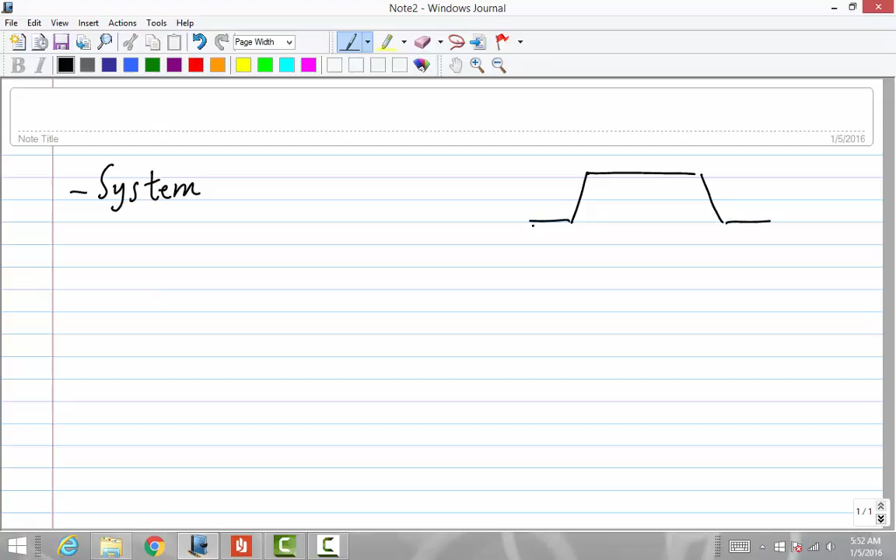Okay, so now let's talk about a system. Here I'm going to talk about how do we define a system. As an example, let's say you're in a gas station and you're taking gas. So here's your car, an old one with the wheels and stuff, and you're taking gas. Let's say here's your tank, the gas tank. And here's the nozzle, so there's a gas flow.

And simple, right? Let's say the question is about the gas. It might be about the flow rate, temperature, volume, all these properties we've faced so far. But let's imagine it is particularly about the gas.

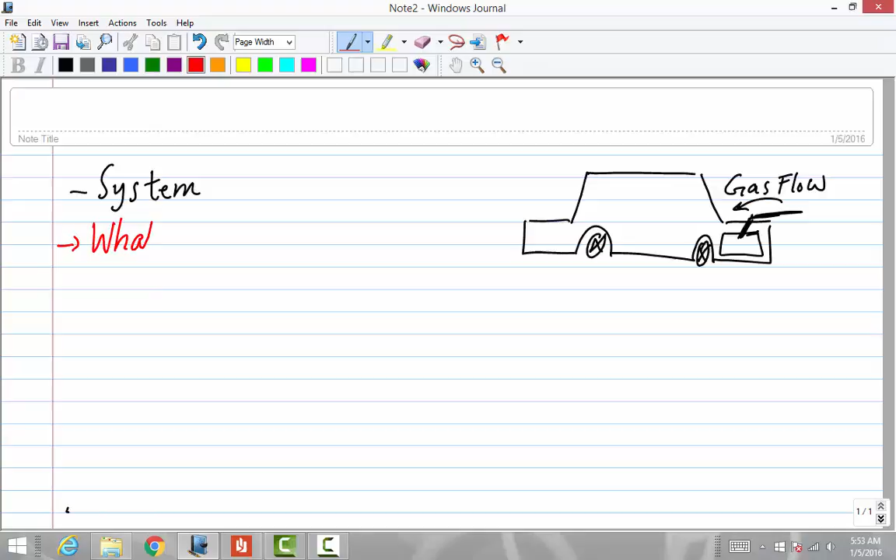So in this case, the first step we need to take is to define our system. But before defining the system and going over the solution and equations, we need to ask ourselves a critical question: what are we interested in? And also, our point of view. What do I mean by that?

In this case, we have two options. We can pick just the tank, the body, and define an inlet, which is the nozzle, or an outlet if there's any leaking, and continue solving the question. In the other case, we can just zoom in and concentrate on the gas, and as we're taking the gas, the system, which is just the gas, is going to expand, because there's going to be more gas in the tank. So it depends on your point of view.

You're just going to pick the tank as a fixed volume and imagine there's a little opening that the gas is coming in, or you just want to zoom in and concentrate on the gas and imagine it's expanding. So think about it a little bit more and imagine which of these two points of view you want to take.

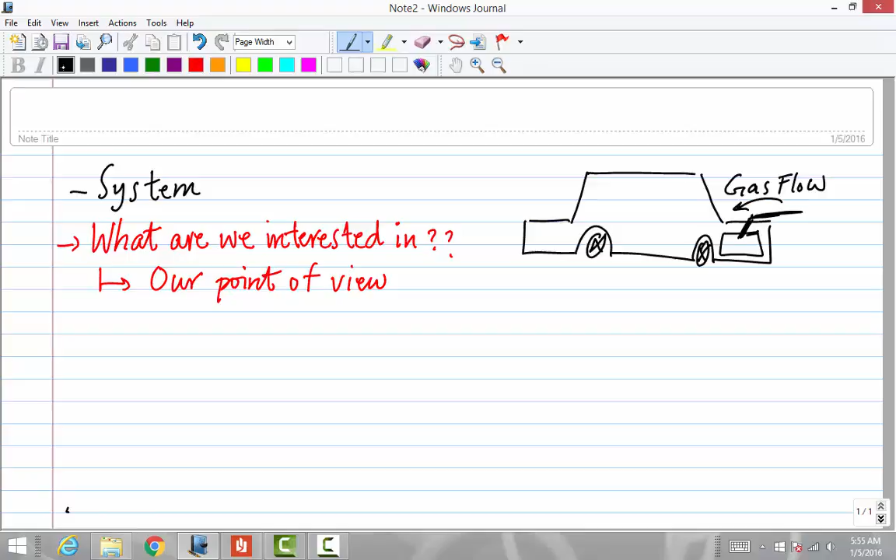So let me go into detail about this. We have two options: one option is an open system. What do I mean by open? It's about mass. When I say open, I am talking about mass, which means mass is allowed to be transferred. Or a closed system — again, closed, I mean mass.

So let me tell you again: do we only focus on the gas as it is expanding, or concentrate on the tank body? Which one is open? The tank. Because I mentioned we should imagine a little opening for the tank, that the nozzle goes in and infuses the fuel inside our system. So when you pick an open system, it means you are interested in a fixed volume, which is the tank body.

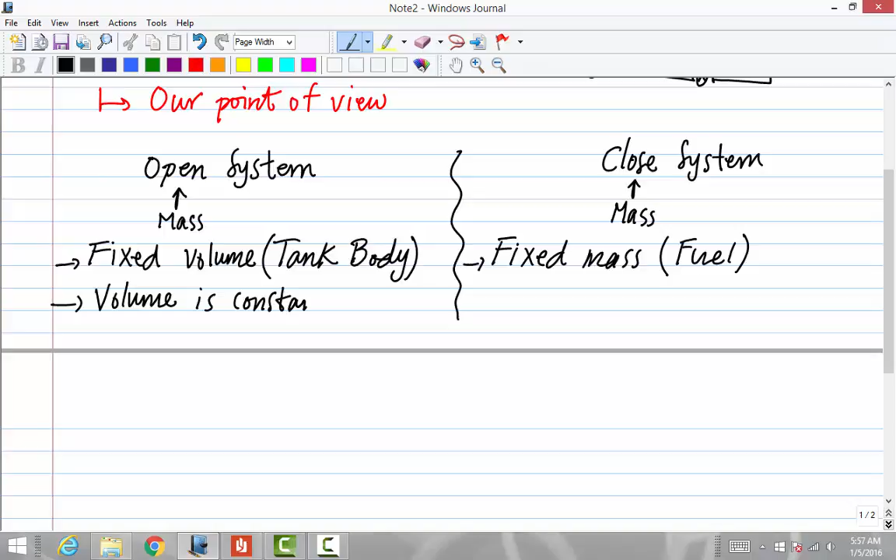But when you talk about a closed system, you are only interested in a fixed mass, which is the fuel, the gas. In this case, volume is constant. Here, in the closed system, volume changes.

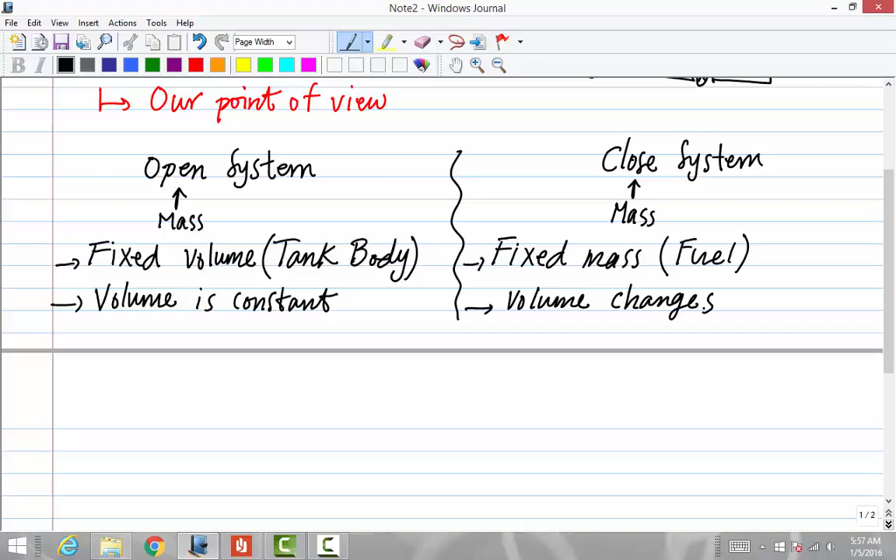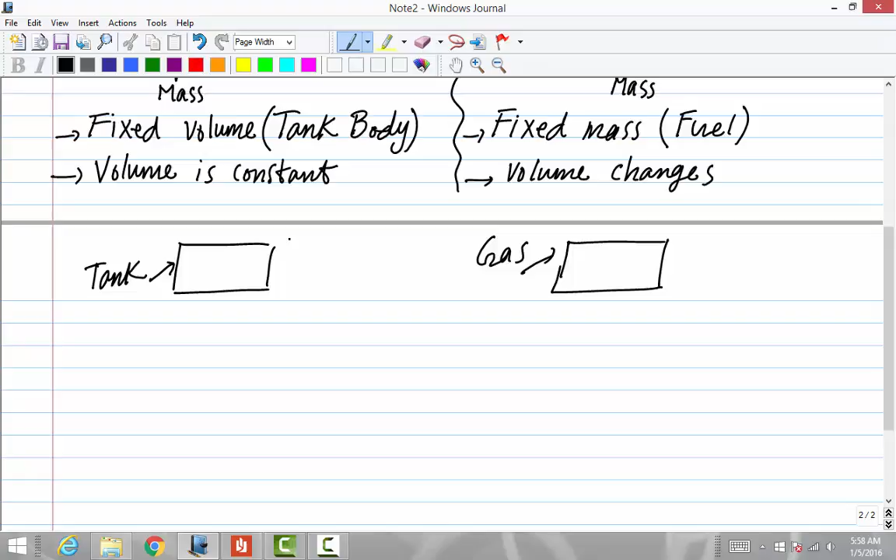The system here is the tank. Here is the tank. Here the system is the gas. It's a little bit tricky because here in the tank, in the left system, the tank includes the gas, right? But I'm repeating this again. It's just a point of view - how do we look at the system? Let me give you another example.

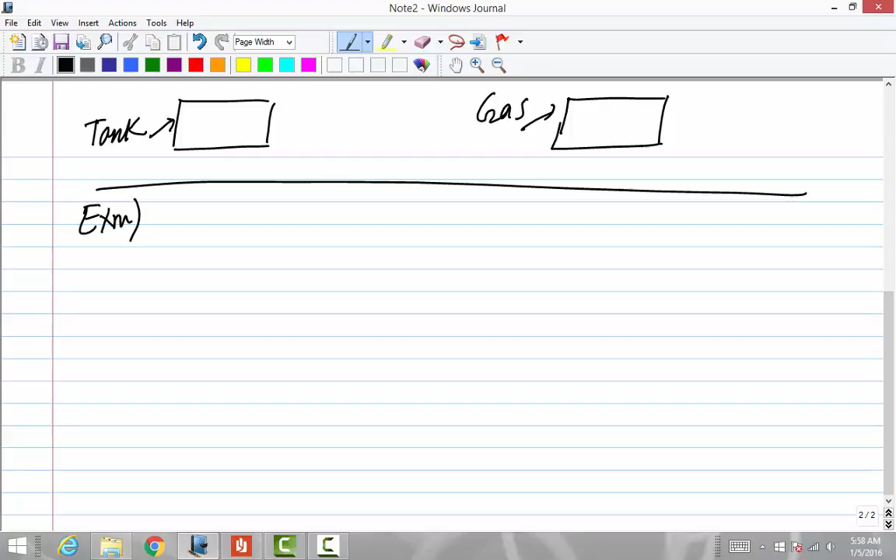Again, open system and a closed system.

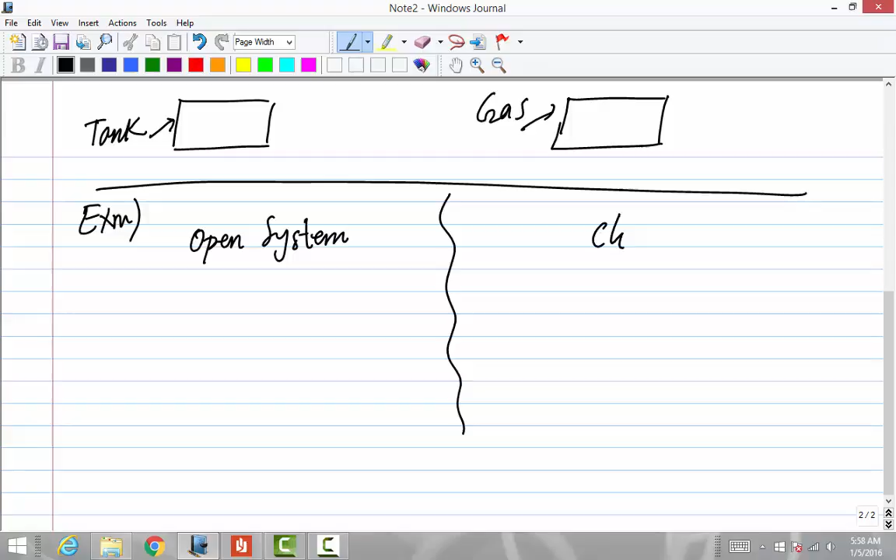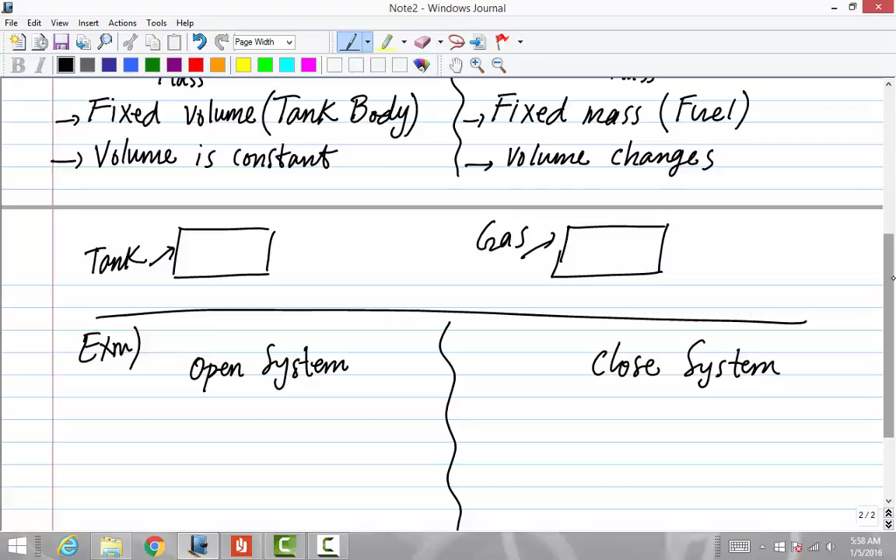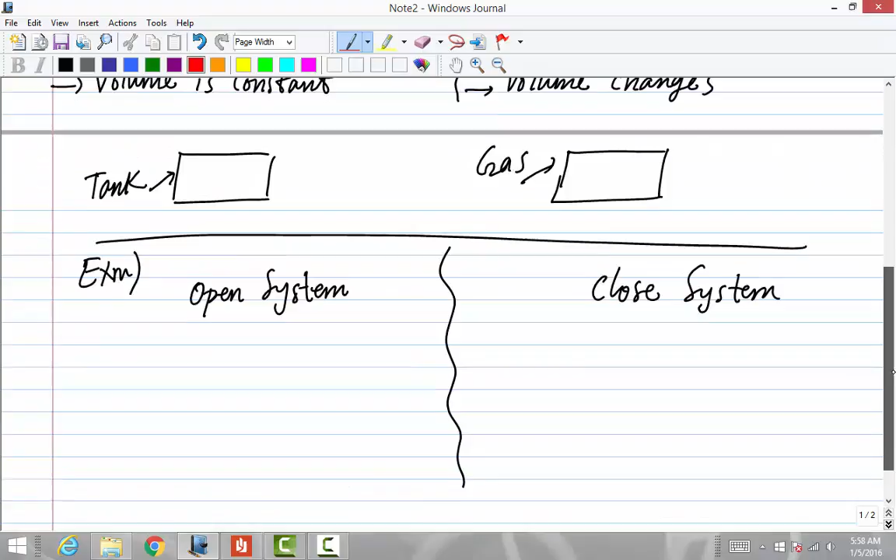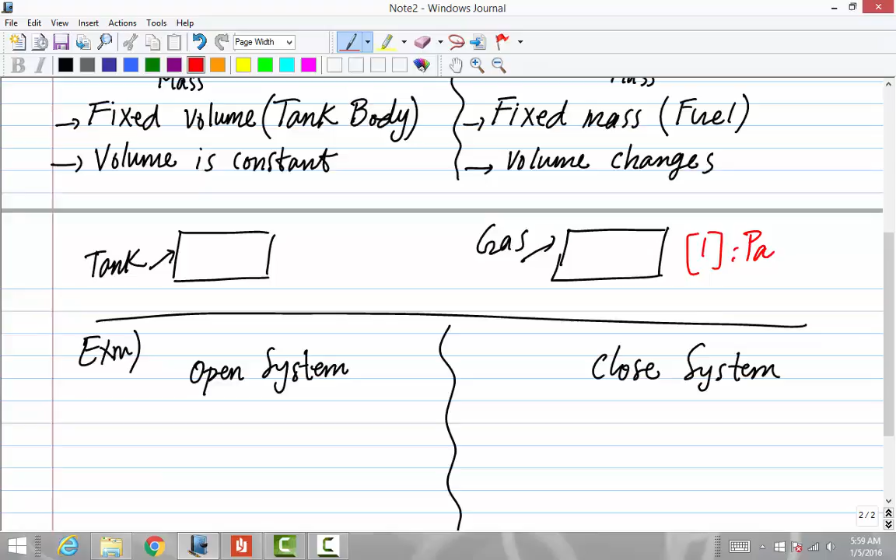Before I switch to the other topic, let me address here that you might want to take a look at lecture number 1, pages 1, 2, 3. Here for the open system, check lecture number 1, page 5. And for a closed system, again, number 1, page 4.

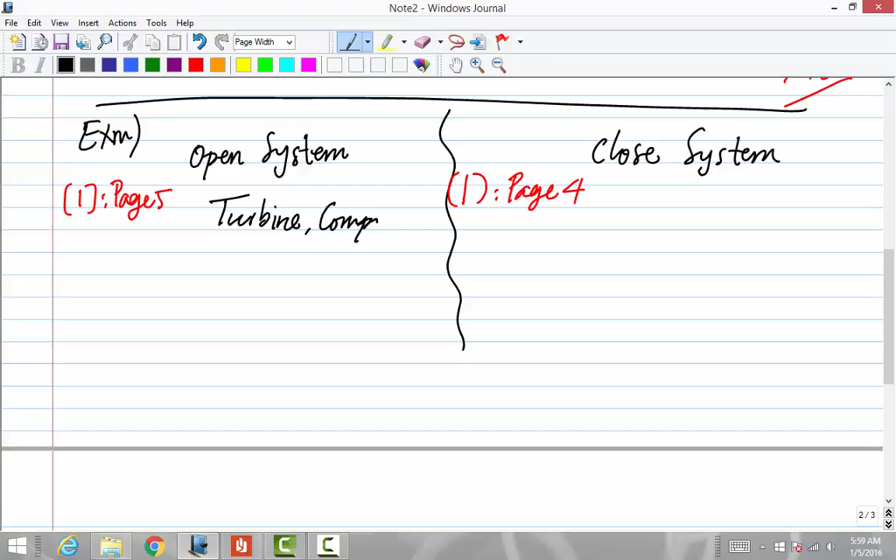A typical example for an open system can be a turbine or a compressor. These are two common examples. And here, piston cylinder. Okay?

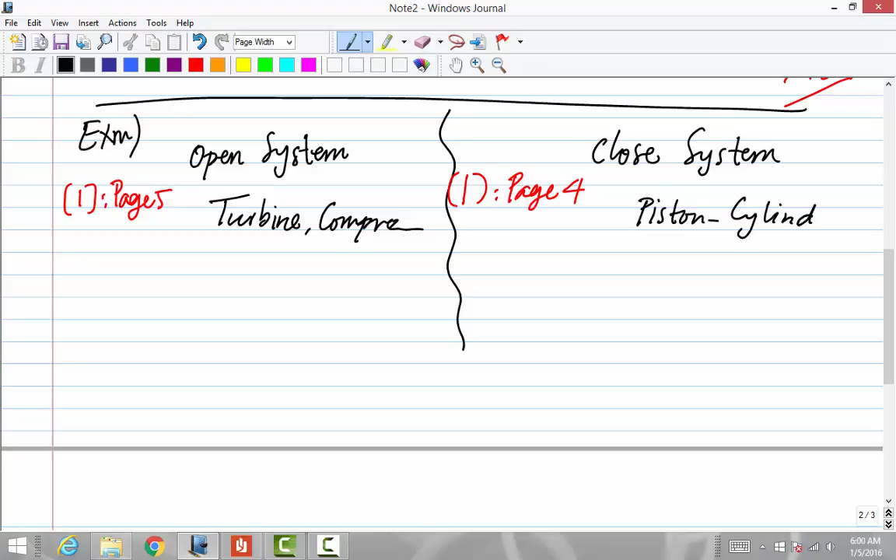So, in an open system, we're going to talk about a fixed volume. So we just concentrate, we focus on a fixed volume. And mass can come in and go out. Energy can come in and go out.

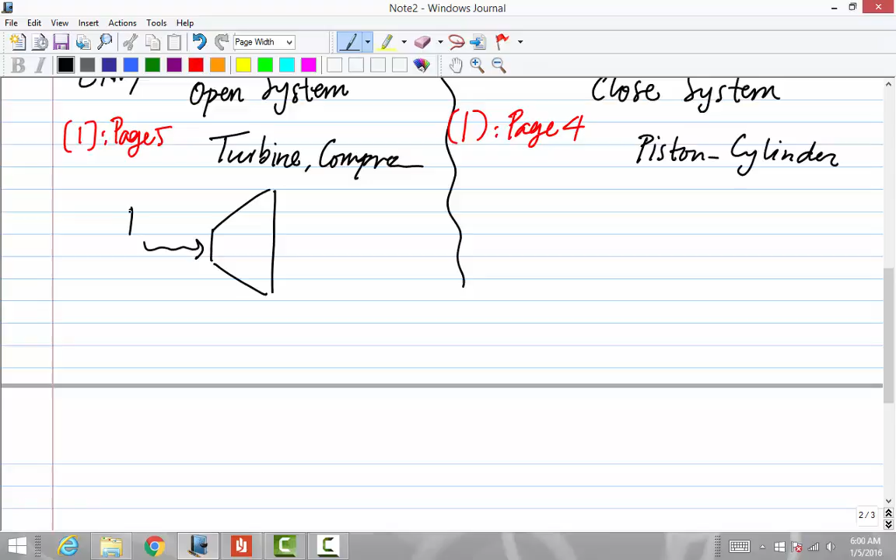So if I pick a turbine, mass and energy are coming in and leaving the system, right? And also only energy is allowed to leave the system through the boundaries of the body of this turbine. Only energy, because let's say it's perfectly sealed.

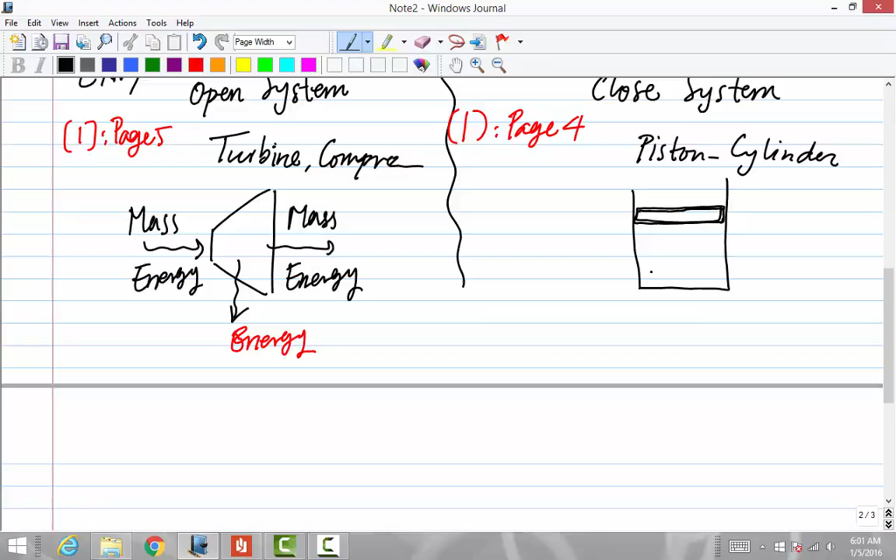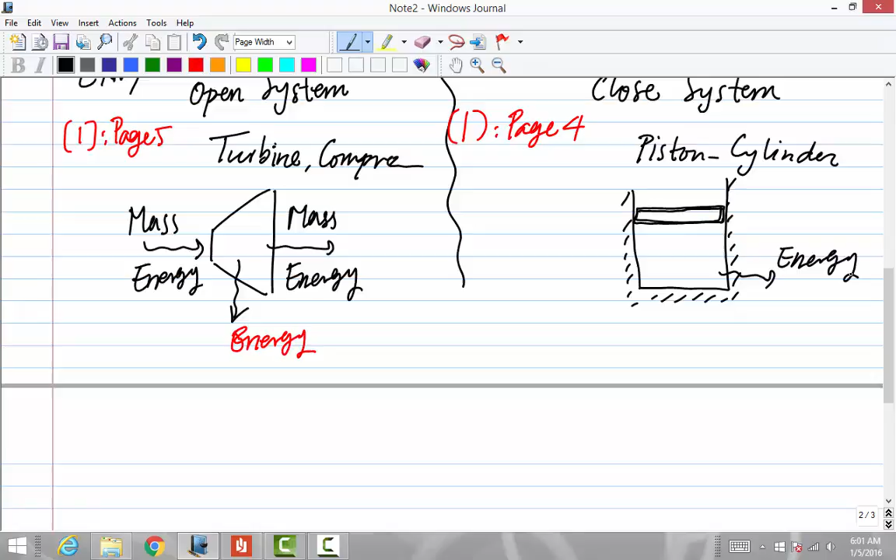On the other side, I have a piston cylinder device, right? The piston is relaxed on this gas underneath, and it can freely move, and the body and the walls are perfectly sealed, so only energy can leave the system, not the mass. Again, this is a closed system, no mass - unless there's an opening there somewhere, an exit or inlet or leaking or something.

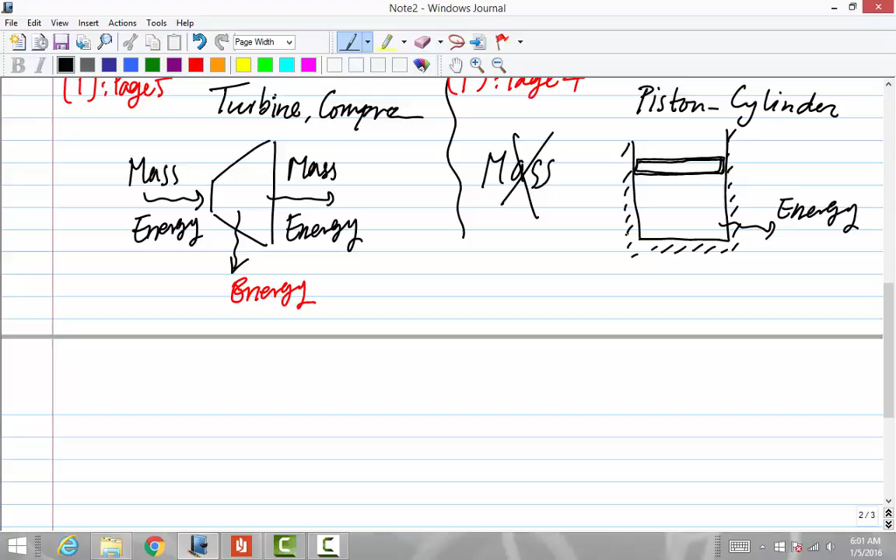So in this case, in an open system, we are working with an imaginary boundary.

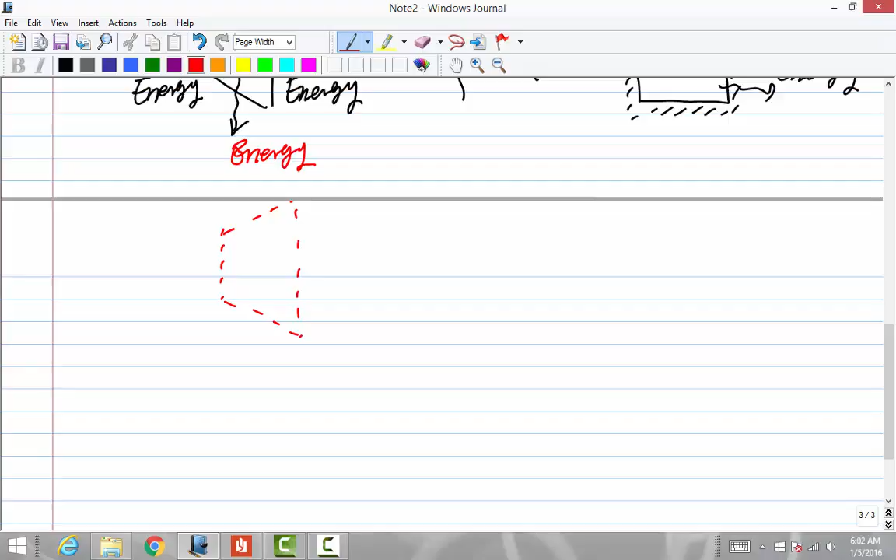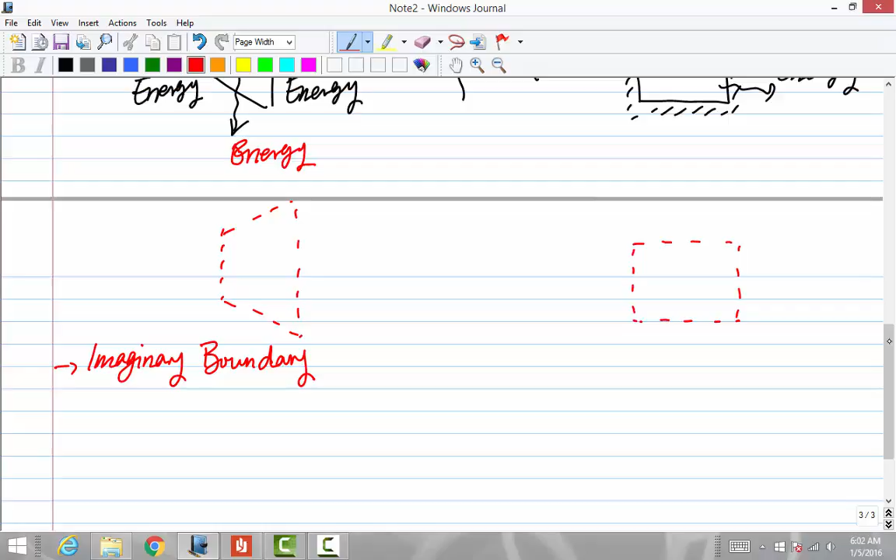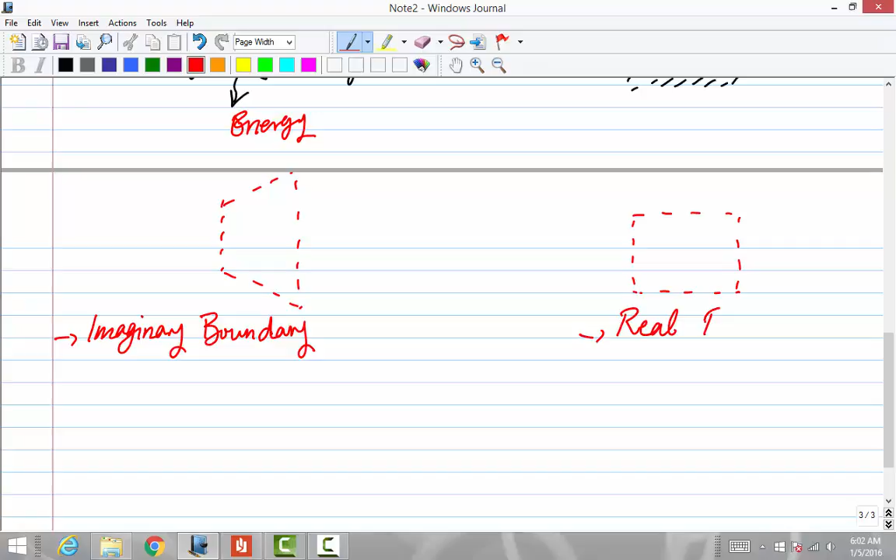And in a piston cylinder, you're only talking about a specific amount of mass underneath the piston, which is trapped here, right? So the boundaries are real, the walls and the piston - so real boundary. In this case, in the left case here, the boundaries are called control surface, right? But here they're just walls, right? They're real.

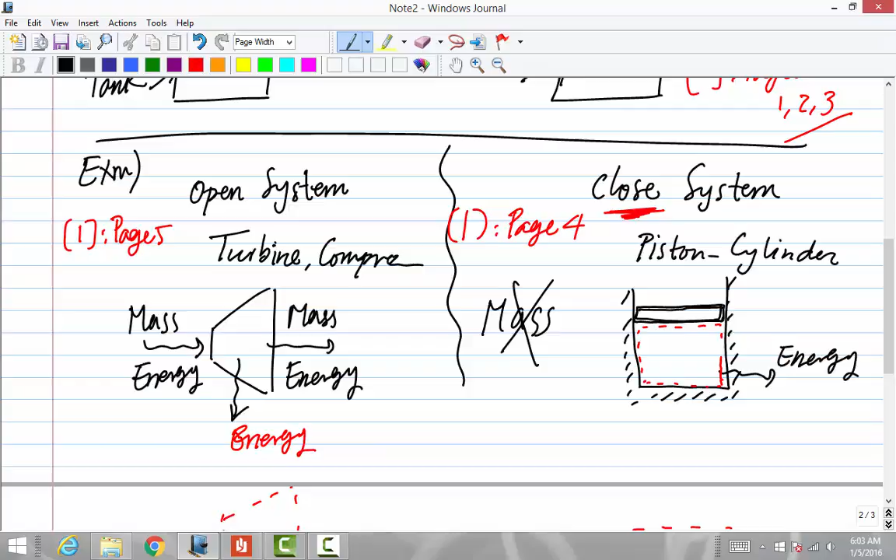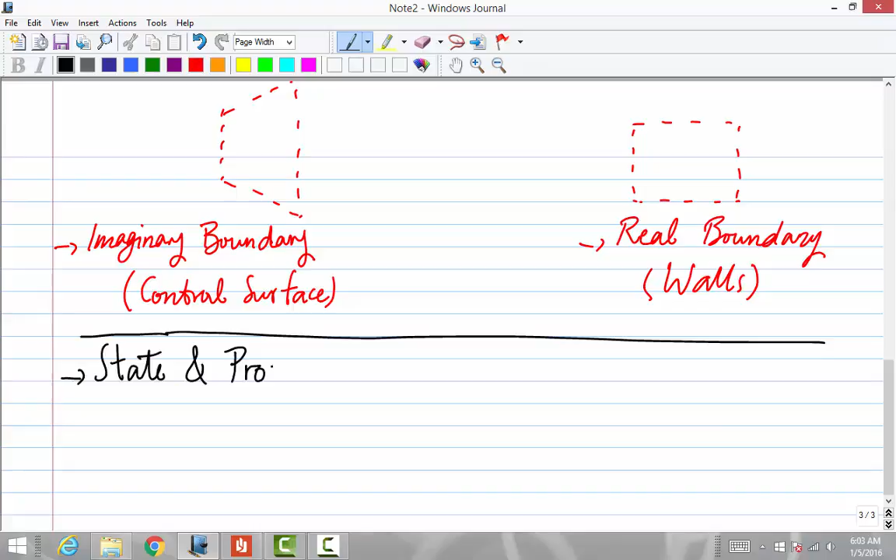The second topic that I want to talk about here is state. Okay, state and process. So, take a look at the presentation, lecture number 1, page 6.

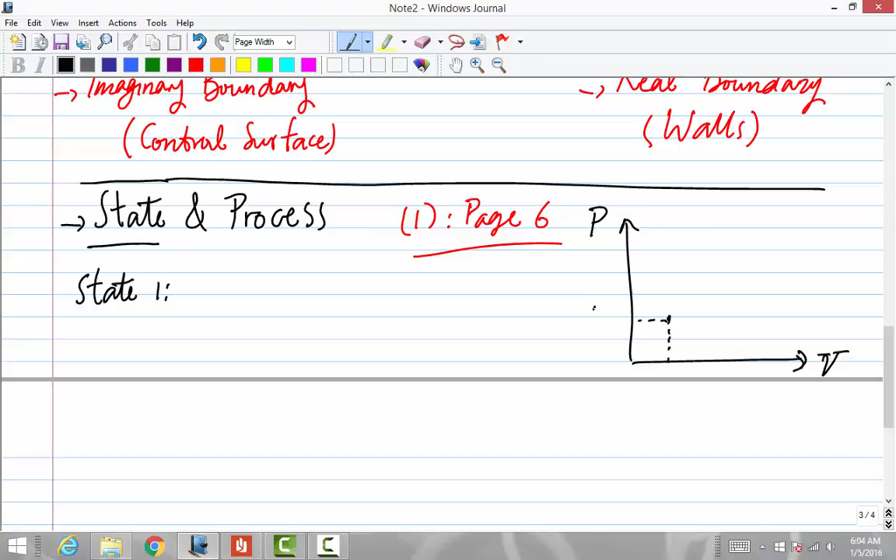When we talk about a state in a particular example, we focus on some specific properties. Imagine I am plotting pressure versus volume. Okay, when I talk about state 1, I am talking about a specific point on this plot, for example here, and then the corresponding pressure and volume are going to be P1 and V1, right?

And then meanwhile, as I warm up the system, do work or gain work or do chemical reaction or all these some sort of energy transfer, which is like heat or work, can be either in heat or work type. When I go through all of these transfers, I am going through a process, and process is a path in between two states. So from state 1 we go to state 2. So the intensive properties are changing - pressure, volume, let's say a specific volume because I'm mentioning intensive, it should be per mass. And temperature are changing from state 1 to state 2.

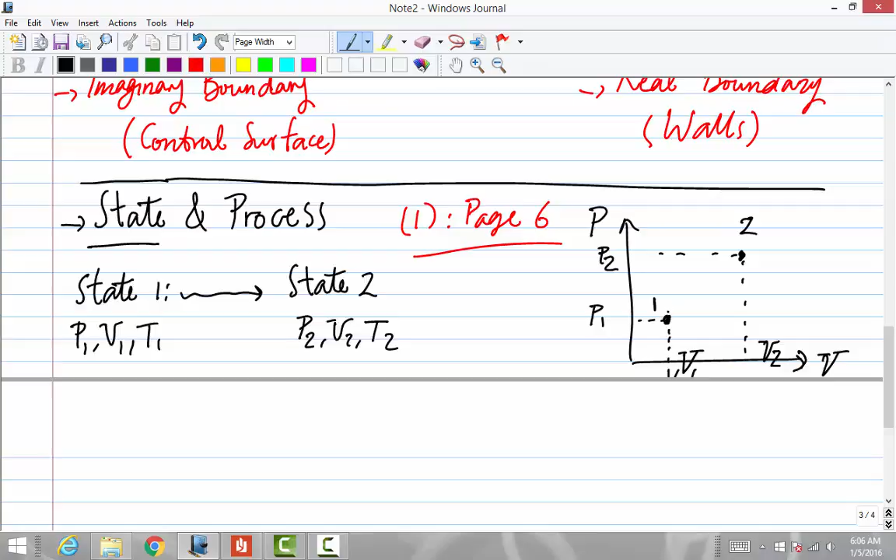Let's say here - again, the corresponding properties are going to be P2 and V2. And this path from point 1 here, point 1 to point 2, can be in any shape. It might be linear, or it might be curved facing downward or upward, depending on how we are changing pressure and volume. Let's say it's like that, right?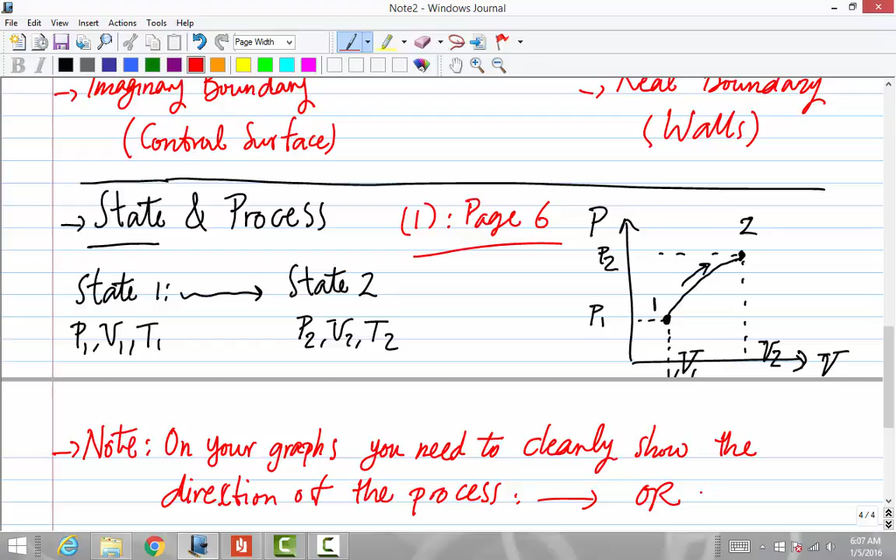So please note, on your graphs you need to clearly show the direction of the process, either by arrow or numbers, like 1, 2, 3, 4, whatever. So keep this in mind.

If I divide these two concepts, state and process, into two categories - for state we define a particular property, like pressure, P1, V1, T1, V2. See, all these notations show that we are talking about a specific property, like the pressure. We know the pressure at that time is something, right? Or you talk about energy, right? We say that our system has 2,000 kilojoules, right? So this is the state. When we talk about energy, just energy specifically, we talk about a state.

Or there's another point that I should address here, is that at some specific states we are able to define equilibrium. Okay.

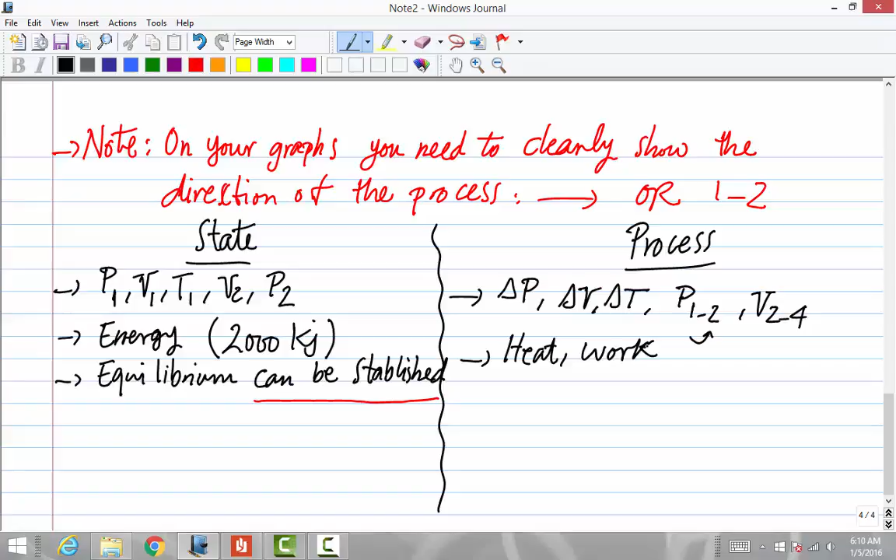And in this case, we do not talk about energy. Instead, we talk about heat or work. So if a question mentions anything about heat or work, you cannot think about equilibrium, you cannot think about state, because it's telling you that a process is going on. When we say heat, it means a constant energy is coming into our system. Or if it says the system is doing work, it means a constant flow of energy is leaving the system. It's a process. Until we stop, everything gets to steady, everything gets to equilibrium, and then we know the pressure is P, for example 8, and it's gonna stay on that value forever, right?

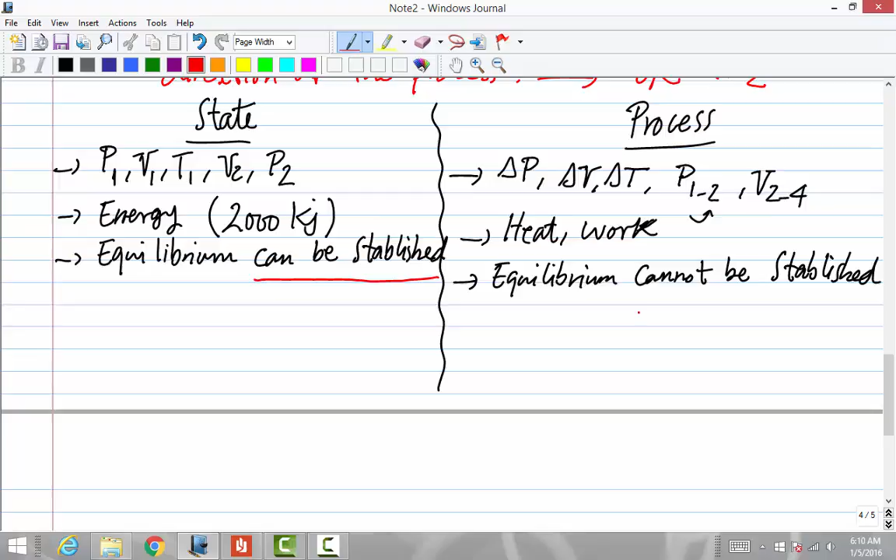Because it's equilibrium, until we don't have any fluctuation. So when we talk about a process, equilibrium cannot be established. Keep in mind, cannot be established, because as long as the process is going on, no equilibrium, nothing.

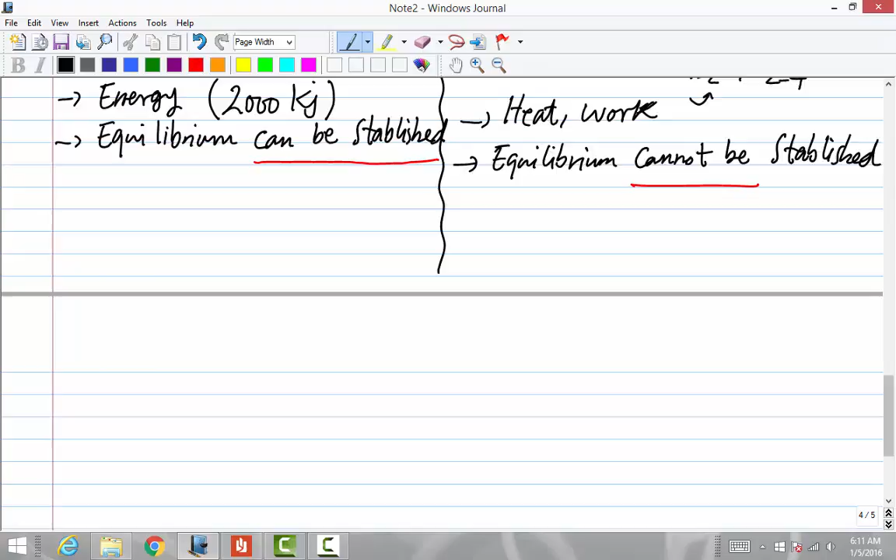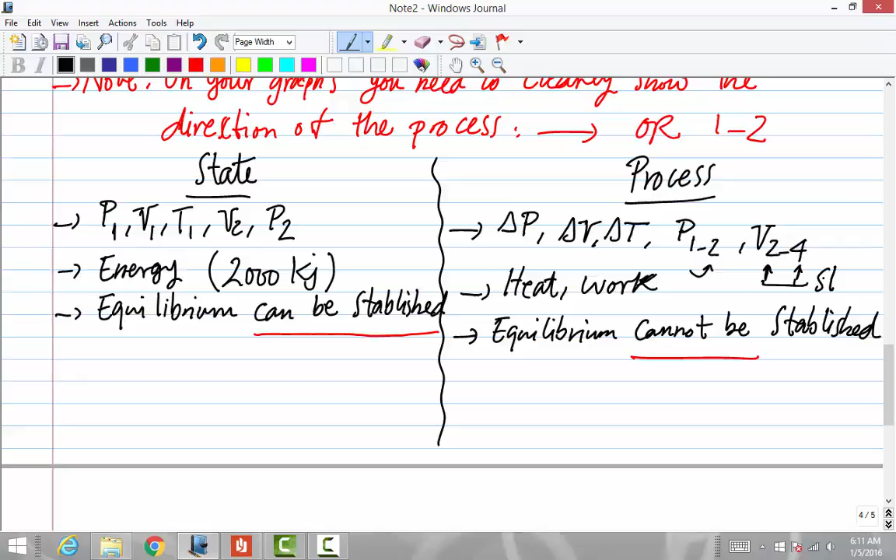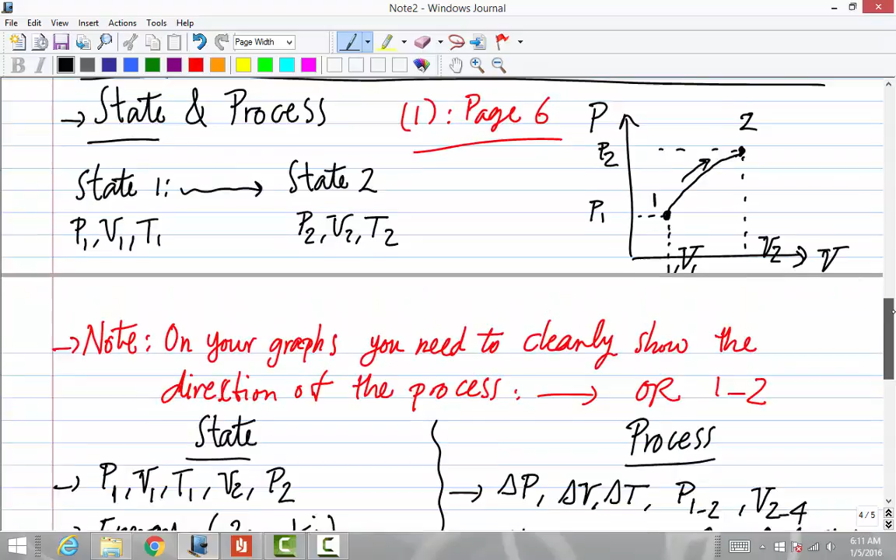So well, let me mention here that these 2 and 4, these are states. Okay, and then, again, I forgot to tell you that

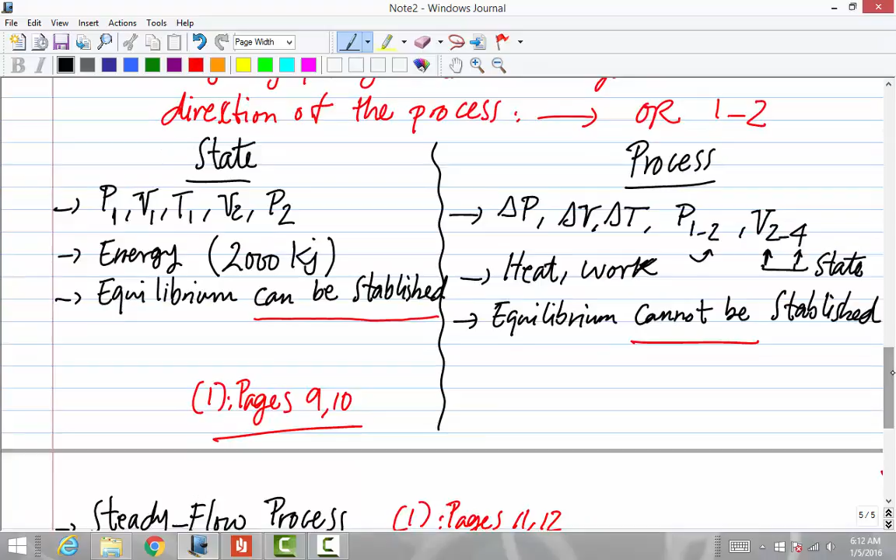So far, I did not mention anything about time. Well, it's tricky. When you talk about a process, needs time to happen, right? But then this process might be a special case, which is a steady state. So a process can be defined in 2 ways: steady in time and transient in time.

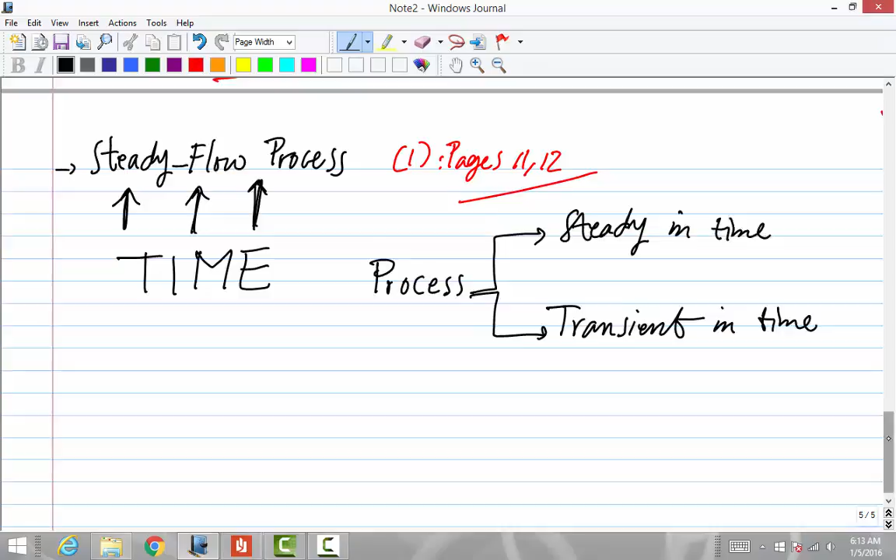What does that mean? It means that if I measure, let's say I have a turbine, okay? If I measure pressure, volume, and temperature at the inlet and outlet of my turbine today, I go home, I come back tomorrow. If I measure pressure, volume, and temperature, these intensive properties, on inlet and outlet again, I will measure the same thing. This is steady in time, right? But if the pressure, even one of these properties, changed the day after, then the whole process that was going on overnight was not steady, because one of the properties changed.

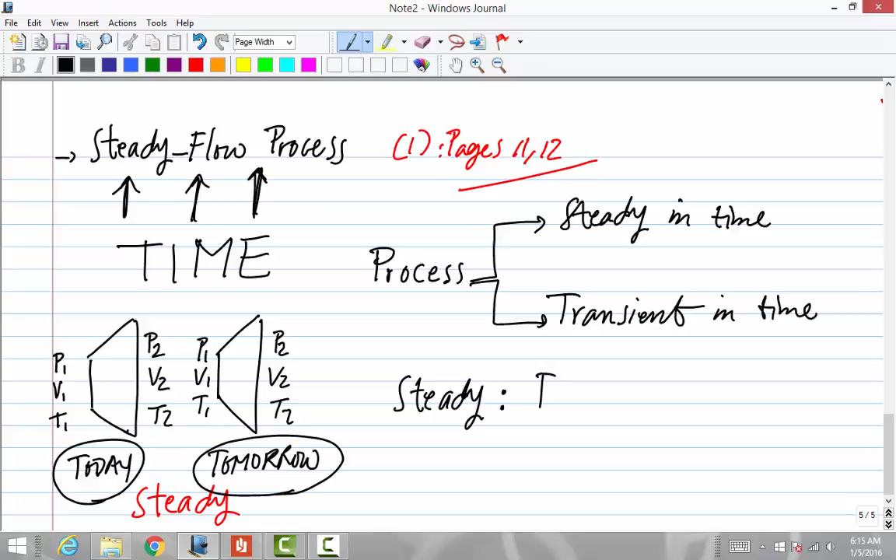And so now we talk about 2 different times, right? So when you say that the process is steady, it means, as I mentioned before, let me write it another way: pressure, volume, and temperature at T1 equals pressure, volume, and temperature at T2. These are times. So just keep in mind that we might talk about state, and if we go from one state to the other through a path, it's going to be a process, and this process might be steady in time or transient.

I will show you, I will recall all these concepts that I talked about in this lecture in the future, and meanwhile I'm solving one example. Thank you for watching this.